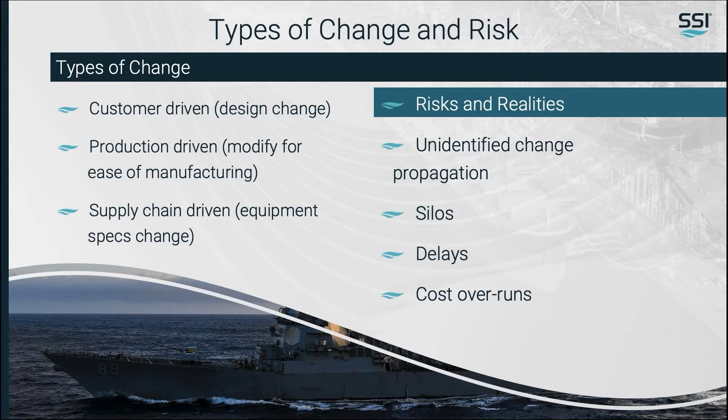All of this means you result in cost overruns. This is what inefficient change management ultimately leads to, both for the shipyard and throughout the operational life cycle of the vessel.

Now I just wanted to gauge how change data is or isn't available within your organization, just so we're all on the same page. So if you see a quick poll in front of you, make sure to fill it out so we can get a better understanding of how change management data is available within your organization.

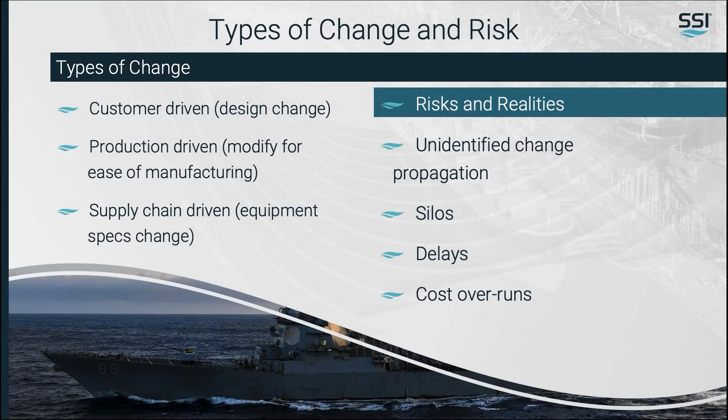Just a few more seconds here. I see some interesting responses flowing in. So 60% of you say that change management data could be manually made available across your organization. That's an interesting result, so let's compare how this sample size did with our assessment of shipbuilding industry leaders.

This is from our digital assessment, done last year with a group of shipbuilding industry leaders. At that sample size, only 45% said change management could be manually made available. But right now, what's even more interesting is that less than a fifth of shipbuilders have change management data consistently available as part of an automated process. Even worse, almost 20% of organizations don't have any change management data at all.

So in a lot of ways, you guys are doing better than you think maybe. So what are our antidotes to this change risk we just talked about? Well, the first one is getting control and awareness. Control and awareness is the key to minimizing risk from unavoidable change, and it means getting the right information at the right time for the right team.

For example, purchasing will want to see a BOM list of all the parts created, deleted, and modified, along with all their corresponding attributes. The weight engineer will want to see a list of parts per SWBS that was created, deleted, or modified. The production floor will want to see the changes to the shop floor documents and any corresponding CNC files. And other departments will want to see a 3D visual of the parts that have changed so they can quickly understand the impact of their change on the activity.

We need to capture a plan for the required change. Understanding what change needs to occur removes the need for never-ending clarification and back and forth. Engineering has a clear picture of what needs to be done when you have this plan. When Simon mentions using tasks to manage change, remember this idea of control.

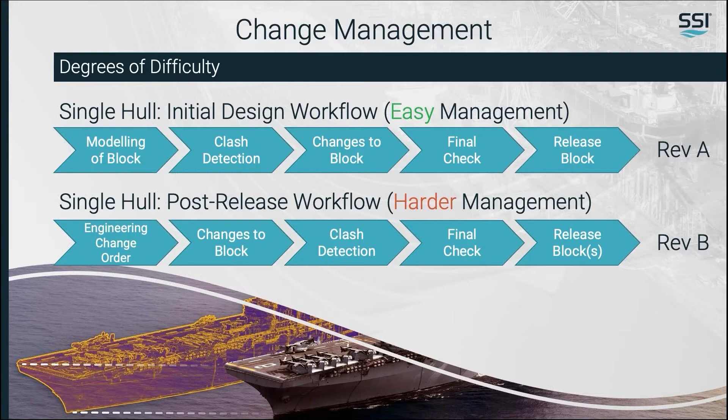Then we have the initial design for the second vessel of class, where the original hull is used as the baseline for the first of possibly many sister ships. In this case, when we make a change to the second ship, we need to decide if those changes are also applicable to the original ship.

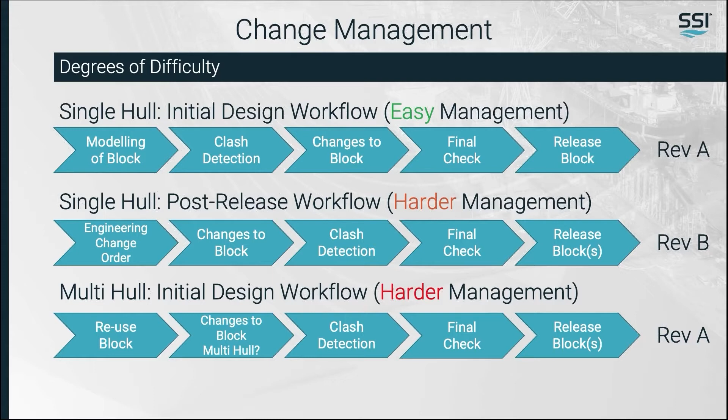Often when building a class of ships, the first ship will only be half built when the yard starts cutting steel for the second ship. Any changes made to that first ship, such as production-driven changes, will need to be seamlessly incorporated into the sister ships in the class.

Finally, the most challenging scenario, managing the configurations of multiple hulls. Multiple sets of drawings have been issued. The changes may need to be incorporated on some of the sister ships, but not others, and sister ships may have different configurations affecting the change. Because of the different configurations, some ships may require supplementary changes compared to the baseline ship. The downstream impacts all need to be understood and tracked.

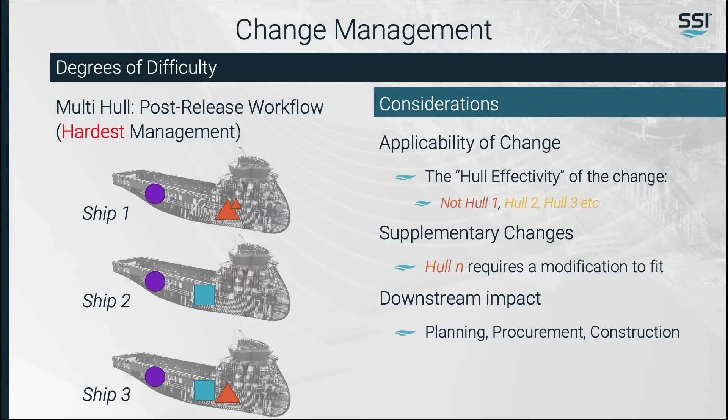To overcome these challenges, we need to reuse existing modelling work and incorporate changes and improvements to follow-on ships. In the example here, the circle change made to ship 1 is applicable to all the ships. The blue square change made to ship 2 is applicable to the follow-on ships. The triangle change made to ship 1 needs to be made to ship 3. However, because the square change affects the arrangement, the triangle change requires supplementary changes.

The typical workflow for the change seems simple enough. The problem is usually identified in a problem identification report, commonly called a PIR. It may have originated from a customer request, production department request, from the supply chain, or following a design review. An engineering change request, or ECR, is placed by an initiator. The initiator could be the customer, engineering team, or anyone else involved in the product development.

The ECR refines possible solutions and decisions regarding the change. Following a design review and approval conducted between the design authority and review board, a solution is proposed and documented as an engineering change order, commonly called an ECO. Once the ECO, or ECHO as we call it in Australia, is registered, the changes can be executed.

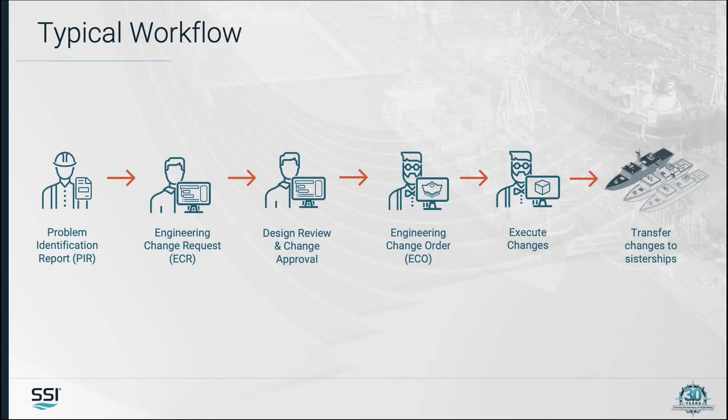The change could be registered using an ad hoc process such as spreadsheet, access database, other disconnected process, or through a PLM system, which Malay will take us through later on. When completed, the change may need to be transferred and replicated to sister ships in the class.

Problems usually occur when designers use disconnected processes. While it may seem like a simple enough change, it will have flow-on effects. Greg gave a simple example earlier where a new pump being installed may require pipe, electrical and structural changes, and those changes may have flow-on effects to nearby equipment. This means different models, drawings, nests, bill of materials all need to be updated, reviewed, delivered and carefully managed.

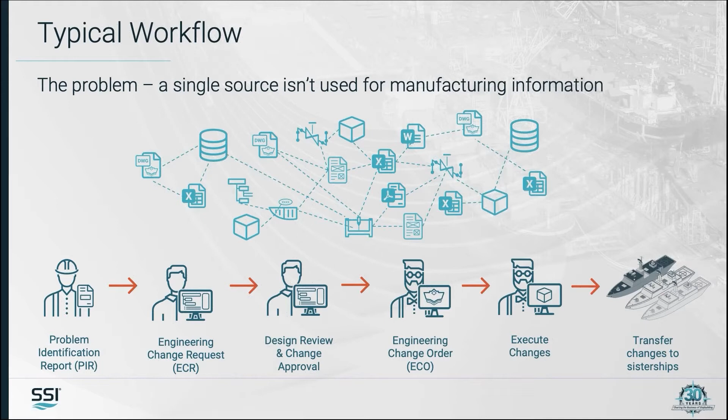Ideally, there will be a single source of truth for manufacturing information, or documentation will need to be updated individually.

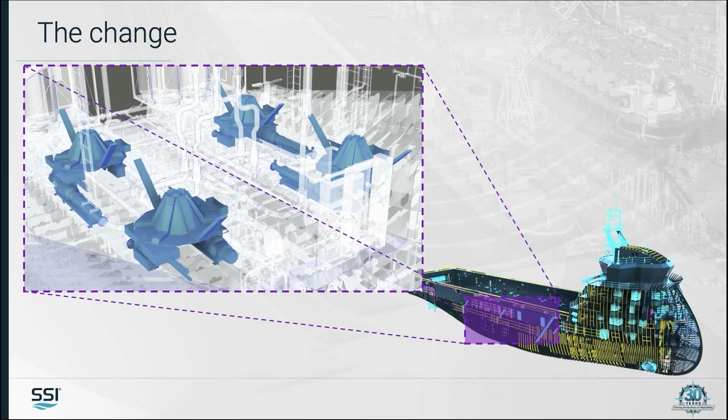I'll be demonstrating this example without using a PLM system. PLM systems can systematically improve the way data is managed. However, it isn't the only way to improve how we manage change. With an understanding of how change flows through the organisation, we can identify the major causes of rework and make incremental workflow changes to improve the process.

Before we begin making the change within the CAD system, I'll hand it over to Malay to discuss how a PLM system could be used to manage the change.

Thanks, Simon. So if you look at the shipbuilding industry, this industry has been early adopters of both CAD and ERP for many years, at least 40 years for CAD.

PLM, or product lifecycle management, is relatively new in shipbuilding. What a PLM system does is support collaborative creation or authoring. By authoring, in this case, you're talking about, say, a CAD system for ship design, then management, which is managing the data, disseminating the data within the shipyard and to organizations outside the shipyard, and use of the product definition information, or in our case, the ship design and manufacturing information across the extended enterprise.

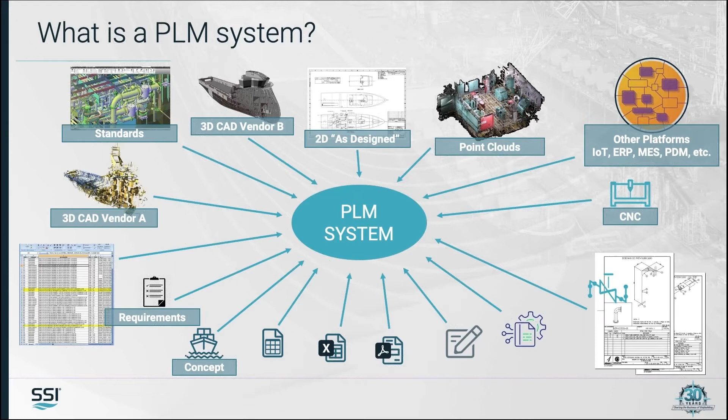One key requirement for effective change management is knowledge capture and retrieval for the current project and foregone projects, which again a PLM system can handle very effectively. So a PLM system actually provides a digital thread for change management, which facilitates a collaborative workflow that links processes across the shipbuilding organization.

sister ships, then different changes affecting a specific configuration of a ship and its roll-on effects, the effectivity of a change, which means which particular configuration and at what time should have that change affected. The required information or knowledge about a product and its current state to evaluate an engineering change is actually resident in different systems in a shipyard, in multiple systems. And this is what a PLM system can help manage.

If you look at the different change scenarios mentioned by Simon, we're talking about different configurations of ships of a class and how change propagates and affects different ship configurations, like the 3 examples we talked about, starting from design to manufacturing, and that can extend to ships in service.

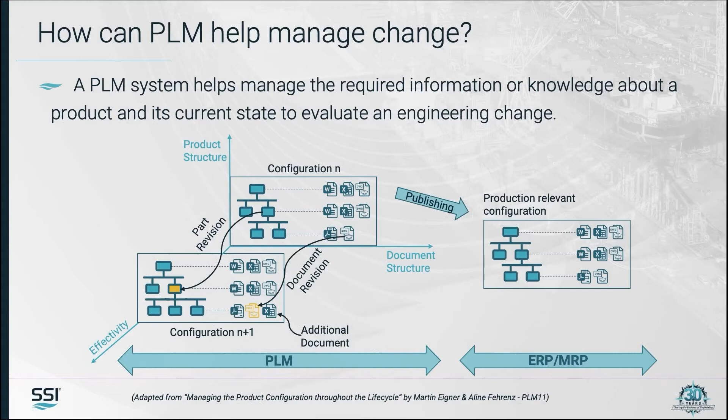So the PLM system enables the change to propagate throughout the life cycle of a product or a ship, making its real impact visible and measurable not only within the design organization, but also across manufacturing and other stakeholders across the extended enterprise. With this, I hand back to Simon for the demonstrations.

Next, we'll have a look at executing the changes. As part of this change, there are many flow-on effects. Connected pipe systems and impacted structure all need to be modified. If the build phase has begun, production drawings will also need to be updated, although it is likely that changes will be reviewed first before drawing sets are revised.

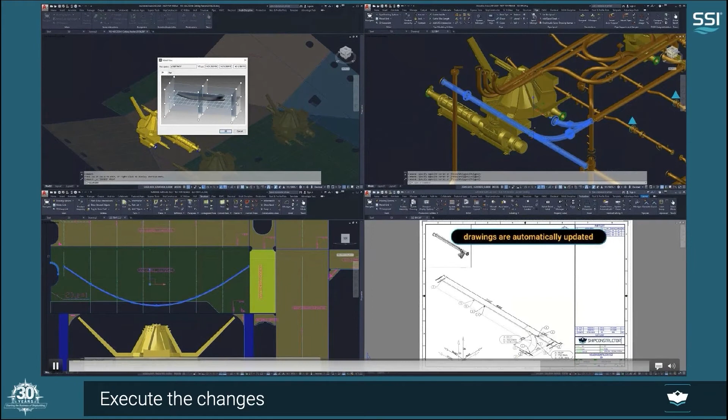Design teams can work through these changes under the tasks they were assigned. As the changes are made, the work is captured and recorded under each subtask. Under each task, we can see the modifications to each part were captured, be it new, modified, or deleted. Changes are recorded at a part level, and a parts-based approach is important for a multi-hull project to simplify configuration management.

In a drawing-centric approach, a single change in the drawing can affect tens of downstream activities and deliverables, which means the engineering team needs to repeat the product development process to incorporate this new information. In a part-centric approach, all product-related information like CAD drawings, documents, requirements, changes, etc., are logically related, and all users have access to the relevant product-related information at any given time, even as it evolves, without waiting for updates to be released, which is inherent in a drawing-centric approach. This way, a part-based approach greatly simplifies configuration management.

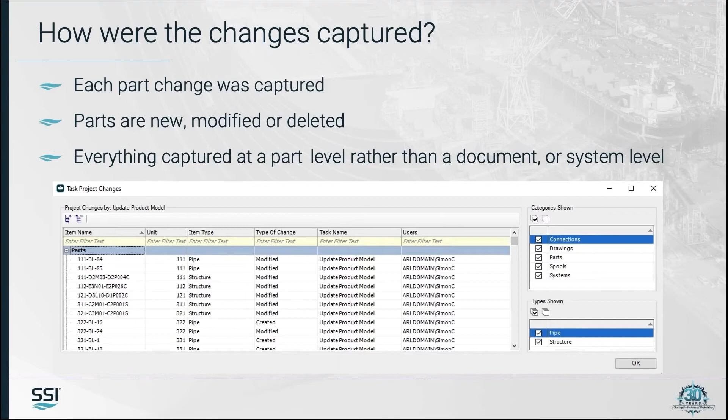Next, we'll look at how the tasks and part tracing can be leveraged. Models and associated metadata can be viewed in real time for review. Load by selecting specific drawings, compartments, assemblies, units, part types, and more. We'll filter for the structural sections, mechanical systems, and the equipment in the affected area we need to see.

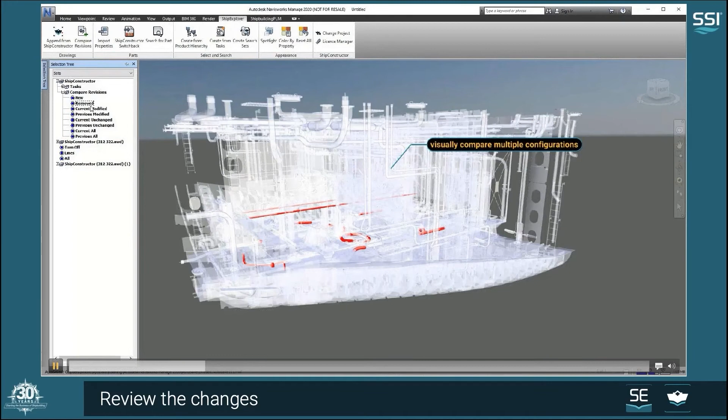Using the revision compare features, we can review the changes: red for deleted parts, green for new parts, blue for modified parts, and yellow for modified parts from the original configuration. Turning off the original model shows only the latest configuration.

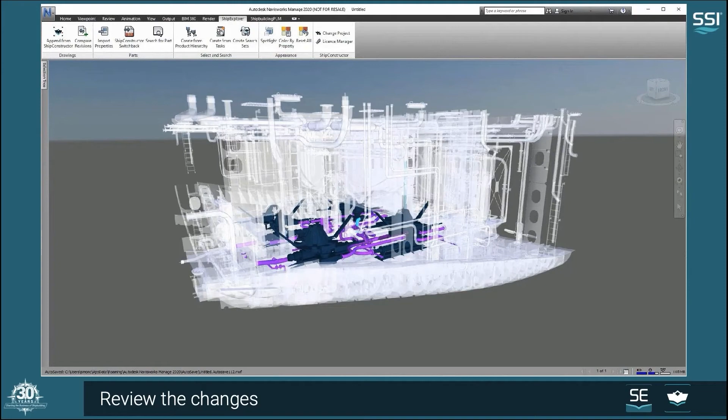Users can spotlight systems, assemblies, and parts they wish to review for clarity, or as shown here, spotlight the work carried out under an individual task or subtask. Here we see in Spotlight the work completed under the first subtask. Part properties can be viewed in the Properties window. Different parts can be shown in different colors to help review. We can use the color by property command to differentiate all the different pipe systems shown in this model.

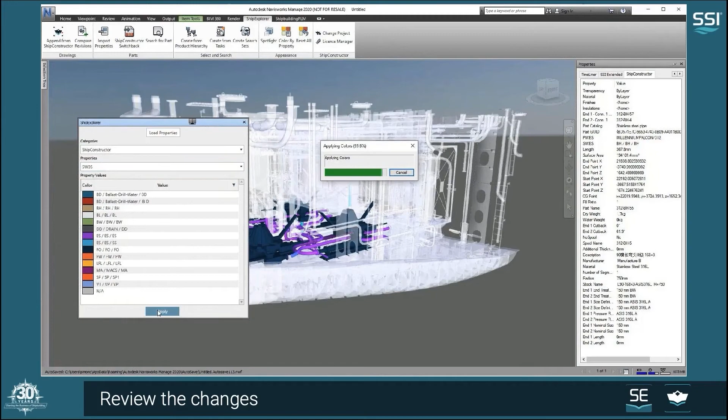Colors can be assigned based on any of the part properties within the product model. If we see a part that needs modifying, we can select it and switch back to the model to make the changes. Just to quickly recap on the workflow used, we chose to load the area relevant for the change. For a big change, you could view the whole vessel.

We then compared the change to the existing configuration. In the case of sister ships, we could also compare the effect of a change on different configurations. Being able to load all the parts in the area of interest in real time lets designers visualize and understand the functionality of the design. We can do a virtual walkthrough of the ship, highlighting or spotlighting changes, systems, assemblies, or parts along the way.

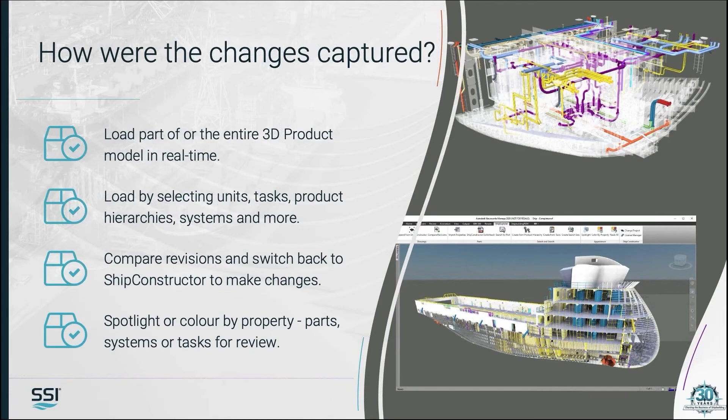But what if we were reviewing the model through a PLM system? The video we just saw demonstrating a 3D review of the design can all be accessed from within a PLM system, shipbuilding PLM shown in the images here. Aside from viewing the model and model data, a PLM system also gives us the capability to mark up views of the model with comments, create a digital approval process, and track changes throughout the entire product lifecycle. Once approved, the documents and any requested changes are incorporated and can be issued for production.

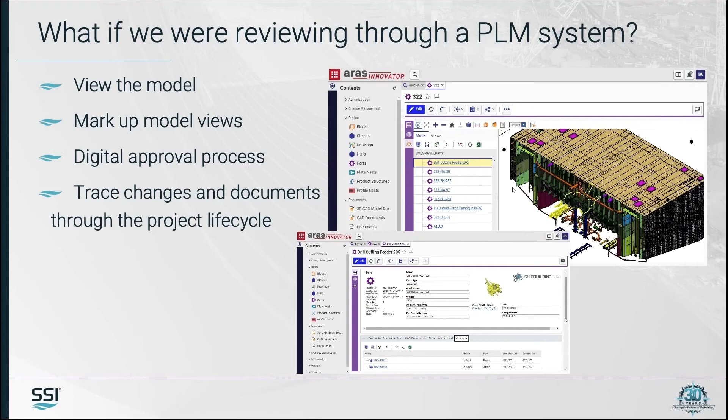Once the changes have been approved, we need to intelligently pass those changes onto sister ships in the class. The changes to parts were captured under each task. We start by selecting the task we would like to transfer, and the destination product model. For this design change, we need to transfer parts, production drawings, nests, and systems. Before transferring, we can review a detailed list of the items to be transferred and automatically generate a graphic preview.

After reviewing what will be transferred to the sister ship, we can begin the transfer. The changes have now been made to the sister ship, and a log file can be viewed.

How are the changes synchronized with the sister ship? Well, the traditional analog method would be to identify all the affected drawings and manually update them. Fortunately, we can now synchronize product models by transferring changes at a part level. New, deleted, or modified parts can be transferred and the associated drawings, nests, and bill of materials updated.

While completing the transfer, designers are notified of any warnings. Any parts conflicting with the sister ship configuration will be identified for resolution. The process I've shown is not limited to transferring changes by task.

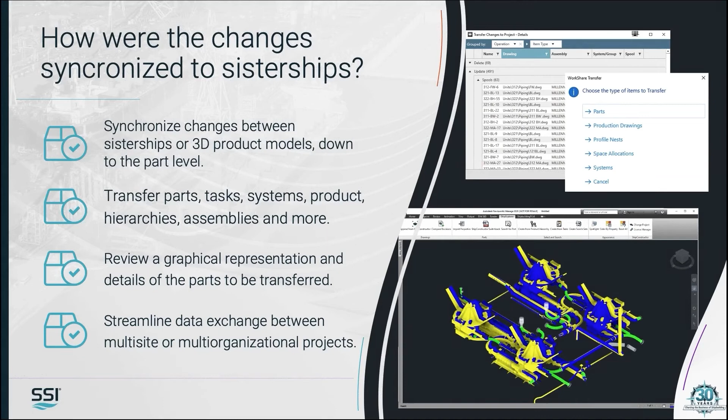Entire systems or assemblies can be transferred between projects. While I've only shown this process used between sister ships, the same workflow can also be used as part of a multi-site or multi-organizational infrastructure. The updated product model and all associated drawings can now be viewed in the PLM system or CAD viewer.

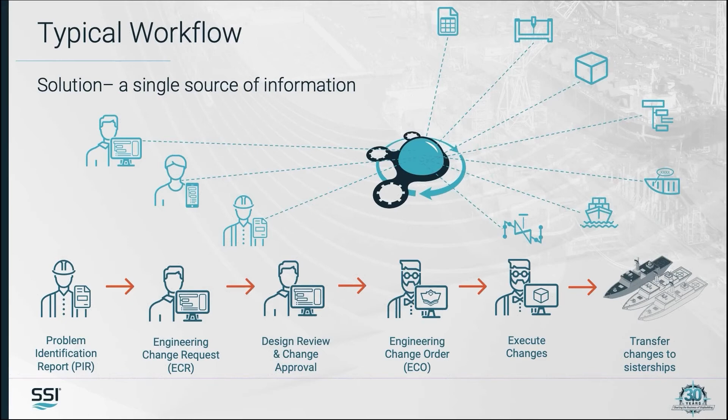As we have seen, change can be carefully managed throughout the project through a single source of truth for manufacturing data. The features we have seen in the demonstration can be adopted at once or incrementally by designers.

Quick recap of the workflow we've just seen. Changes can be effectively managed without disruption to an organization's workflow by assigning work and automatically managing and tracking the changes made to the ship.

The work carried out under a task, such as the creation of parts and nests, can be used to feed downstream PLM and ERP systems if required.

Throughout the design lifecycle, we need to reuse designs and capture changes wherever possible to reduce costly rework. Tracking of changes and the ability to transfer those changes to different configurations at a part level minimizes the risk of change.

You can take the worry out of shipbuilding change by implementing an efficient change management system for knowledge management, enabling capture, management, and reuse of relevant design and product knowledge throughout the change process.

Change propagation: ease the identification of change propagation and aid in decision making and help maintain the design integrity. Collaboration: ensure that the right information is available to the right person at the right time throughout the extended enterprise.

Information interpretation: provide both textual and graphical information in a way that is easily interpreted by anyone involved in the process. And reduced cost overruns by improving the management of risk.